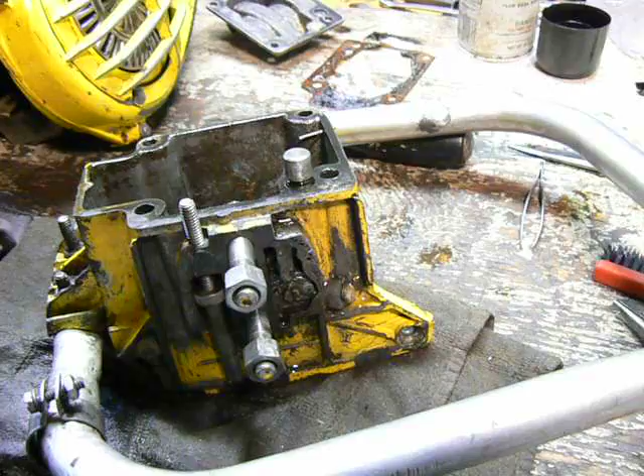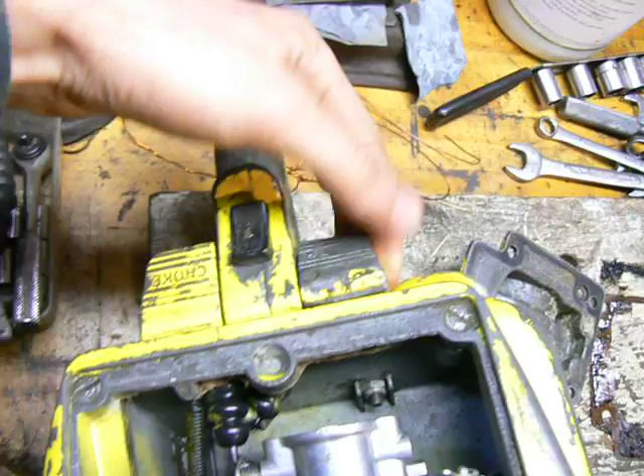One of the problems I noticed with it was that the oiler button, or oiler lever, right here next to the handle, was stuck. It isn't anymore, but I didn't know what it was.

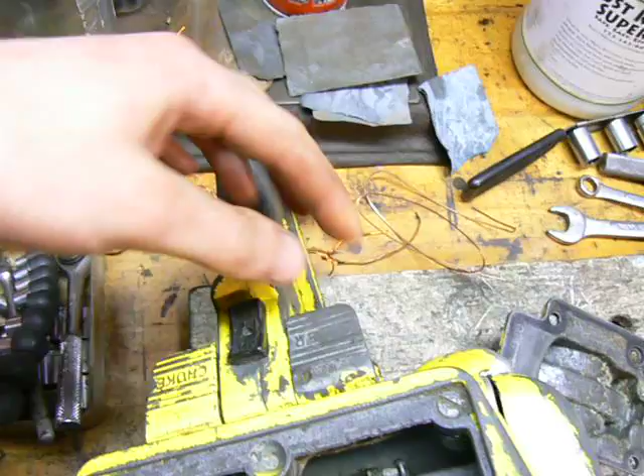So at first I took off the handle, made sure this part of the linkage wasn't seized up, and it wasn't. There's just a rod that goes from here out to the front, and there's this little rod right there. I'll work it and you can see it move. There it is. As you can see, this was all fine.

But what the problem was, again, this saw made a liar out of me. In a previous video, I said the oiler will never be stuck on a vintage chainsaw because it's immersed in oil. Well, this one was stuck.

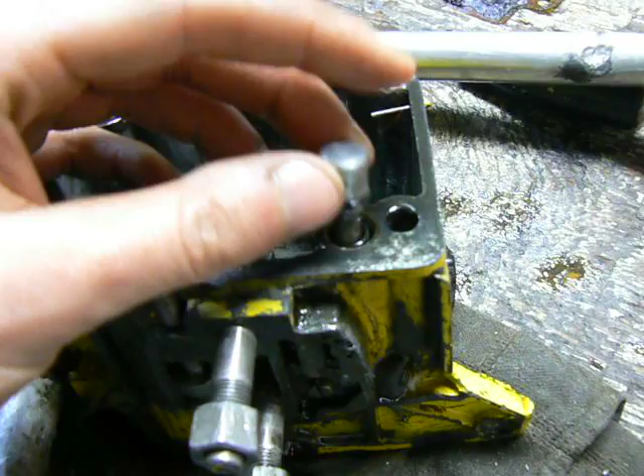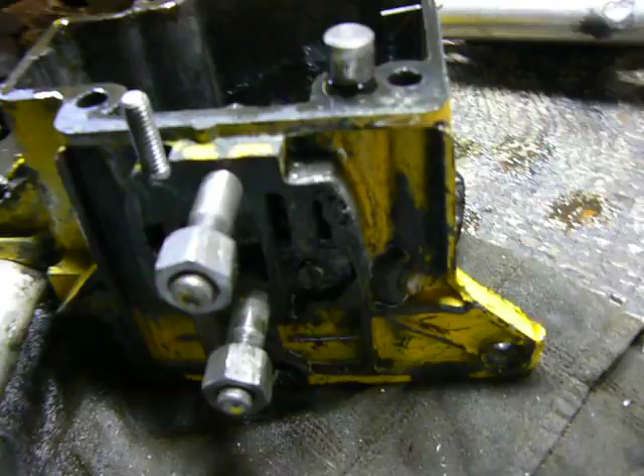This is the oiler plunger, piston, whatever you want to call it, and this was stuck inside the bore. It was down pretty much flush with this surface. I thought, well geez man, how am I going to get that out? Because this is a blind hole - on the other side of the casting here, there's no other end of the hole that goes in.

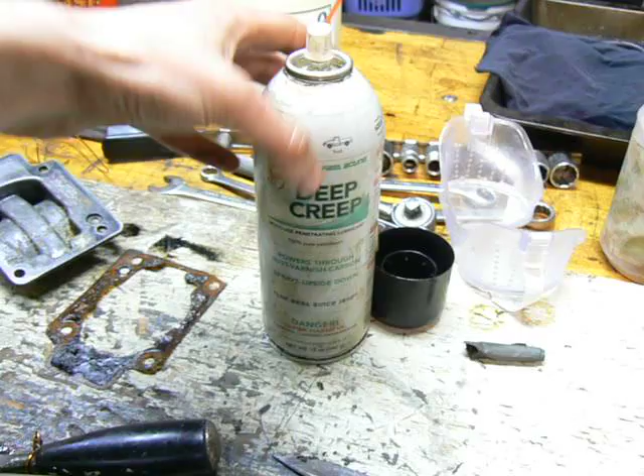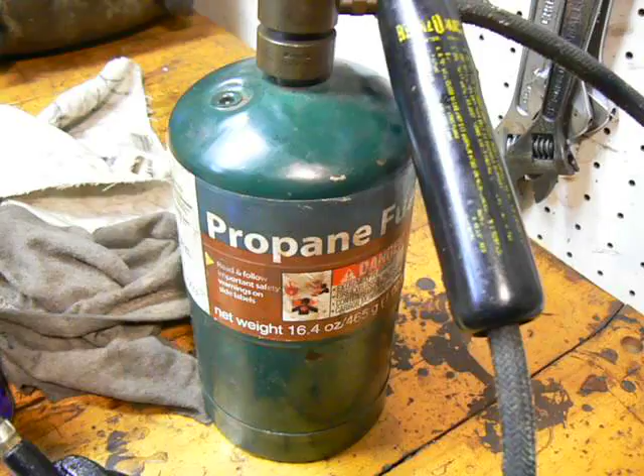Well, you know what, this stuff right here, Seafoam Deep Creep - this stuff is way too expensive, it's $11 a can, but it's loosened up a lot of stuff for me as long as you use it in conjunction with your blue wrench, propane torch. It really helped with a lot of stuck stuff.

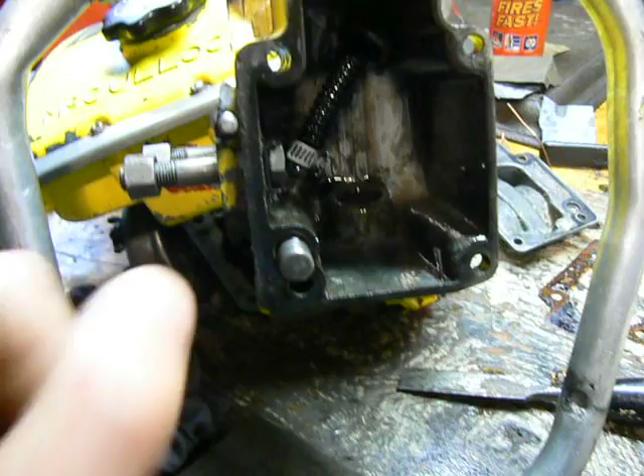So I set it up like this, and I squirted a little bit of oil in there because I previously tried to just push the plunger in to loosen it up, but it just got it stuck further down in the bore. I thought, oh man, how am I going to get that out?

So I put some Deep Creep in here, and I also took off the filler hose, or suction hose, and squirted some inside the other end of this bore, and I just heated it gently with the torch, and all of a sudden, pop!

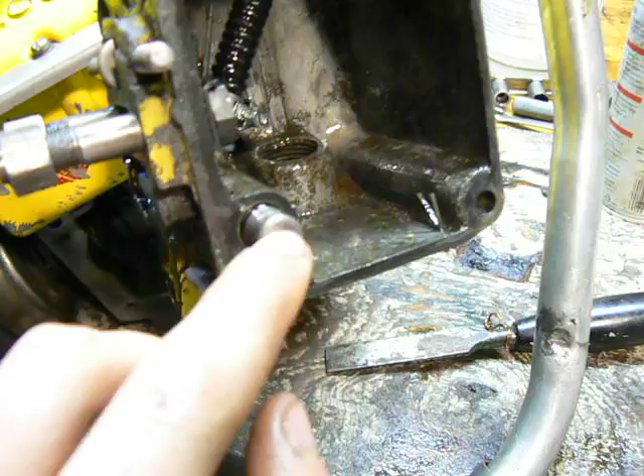The spring went loose, and luckily I didn't get any oil in my eye, because the oil that was in here got shot out when the piston came out and sprayed on my face. Luckily it didn't get in my eye - it was pretty close. But after that, I put safety glasses on.

It didn't come all the way out, so I repeated that process a couple of times. Then the piston came out far enough where I could grab it with tweezers or pliers and pull it out.

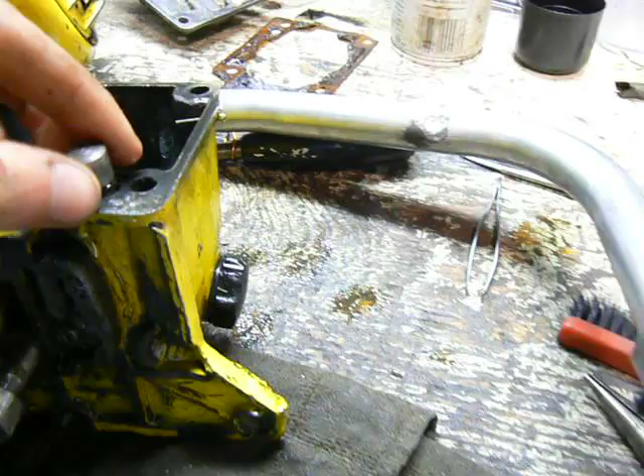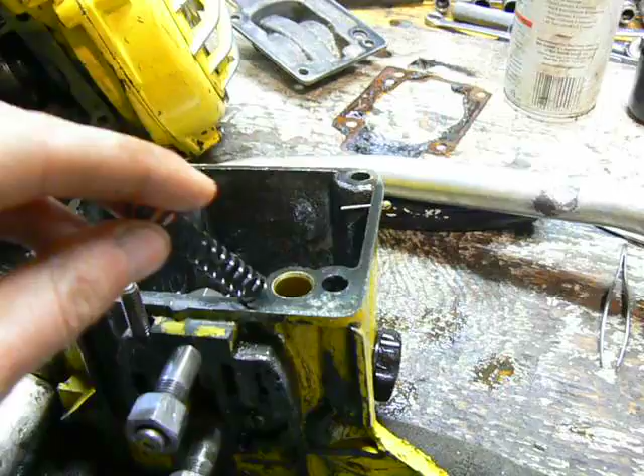As it turns out, it was just a bad O-ring. Here's the plunger - you just use a pick and pick off the old O-ring, and I cleaned it up with some sandpaper. Then there's a spring that goes behind there. That's it, it's a very simple system.

Of course this gets pushed in, goes in like that. And then I'll leave it out a little bit because I don't want it loosening up and popping out and flying out.

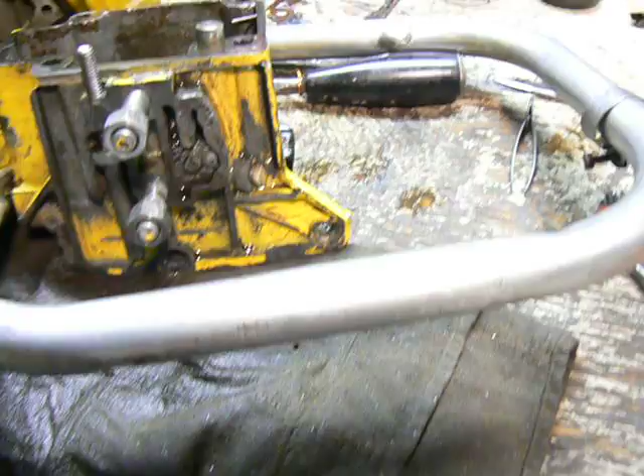I also took this opportunity to do a little more work on the oiler, and I figured some other people might find this comes in handy. Pretty much all of the manual oilers on vintage chainsaws, whether it be McCulloch or David Bradley or Homelite or whatever, all of the oilers work pretty much the same way, and I'll show you what I mean.

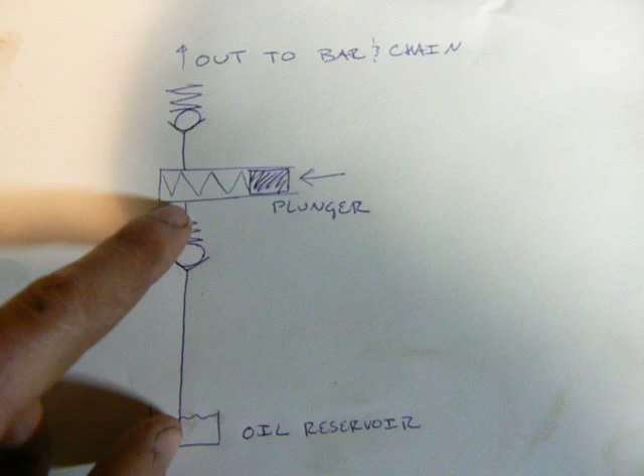I made up this drawing here, it's a pretty simple schematic. Here we have the oil reservoir, and there's a line - in this case it would be that rubber suction line. It goes into a check valve, and then there's your plunger, and then there's a second check valve facing the other direction in relation to the plunger, and then out of that check valve it goes out to the bar and chain.

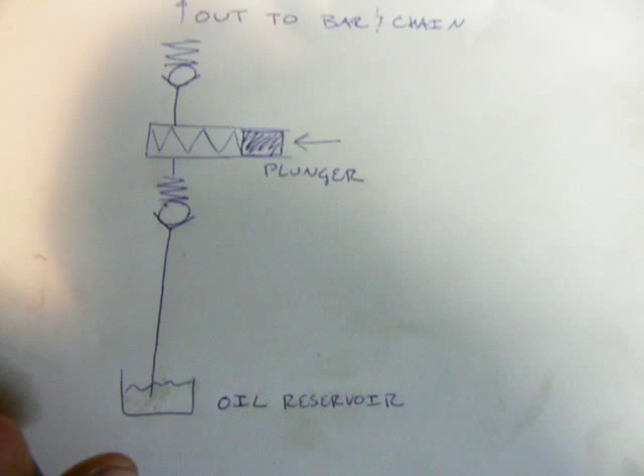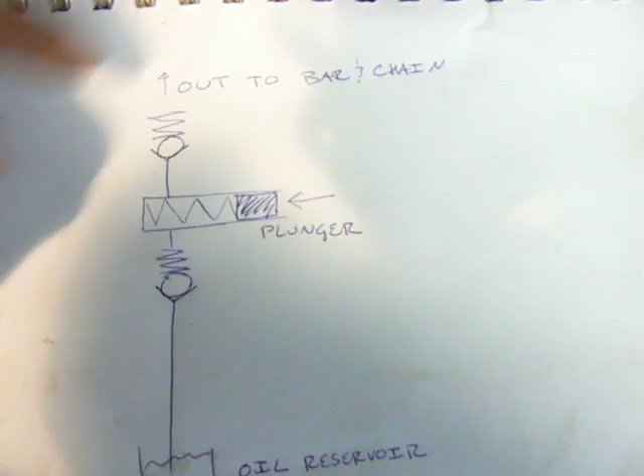If this doesn't look familiar to you, what a check valve is - it's basically just a seat. It's just a hole with a nice even surface, or sometimes a plastic sort of washer, so a steel ball can seat in that seat with a good seal. Then there's a spring pushing down on that ball against the seat, and that creates a seal.

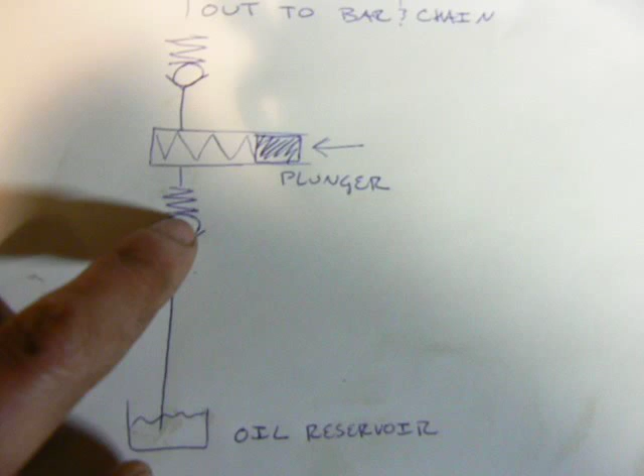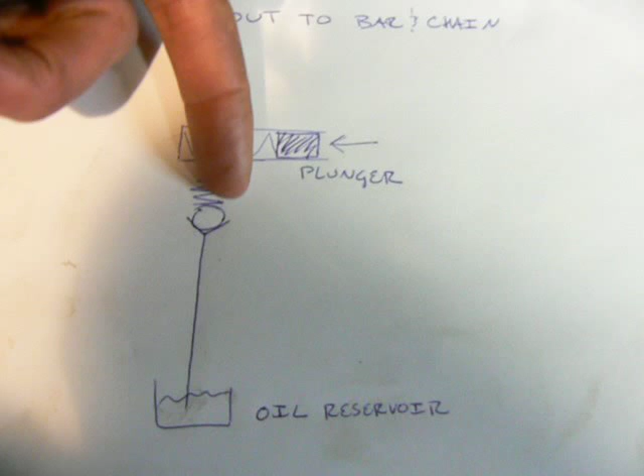So in this case, with this check valve, oil is allowed to flow this way because it pushes the ball off the seat, pushes against the spring, goes around the ball and into the plunger bore. However, oil cannot go this way because when the oil is pressurized this way, it forces the ball against the seat and seals up, so oil cannot go this way.

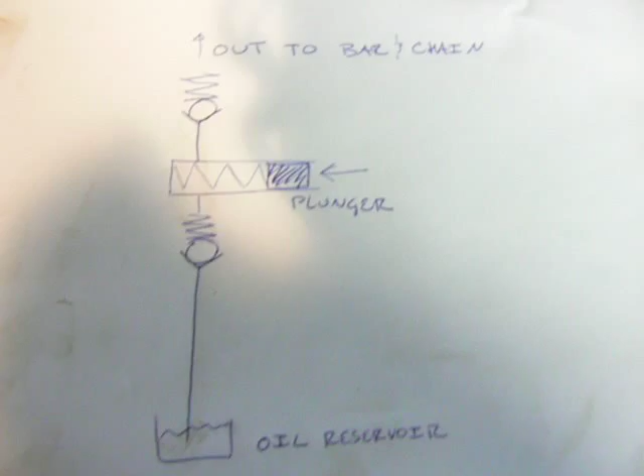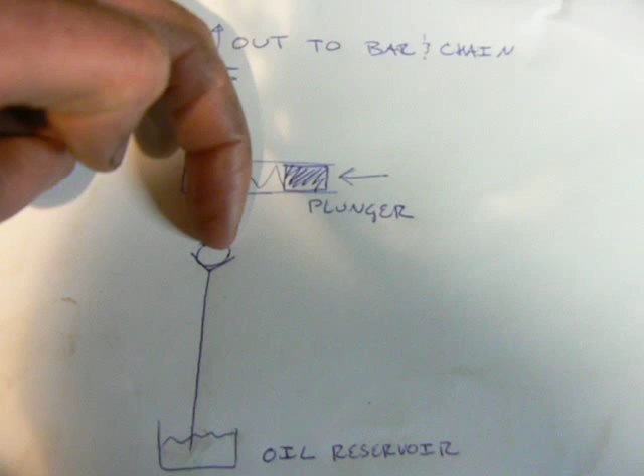So, with one stroke of the plunger, you push down, it pressurizes the oil in here, and it pushes this ball against the seat, so no oil can flow back into the oil reservoir because that wouldn't accomplish anything. But it does push this ball off the seat and allow oil to go out to the bar and chain.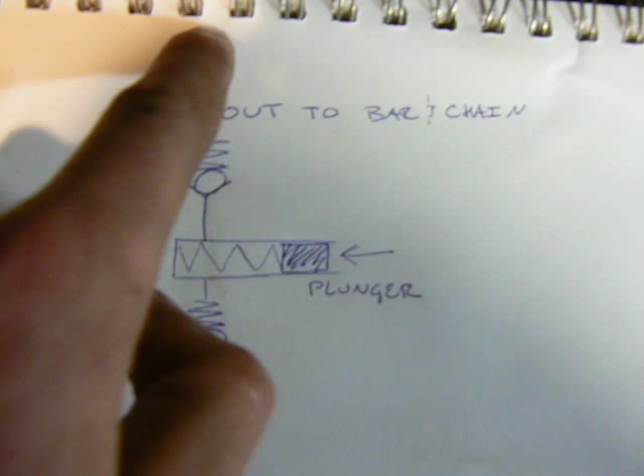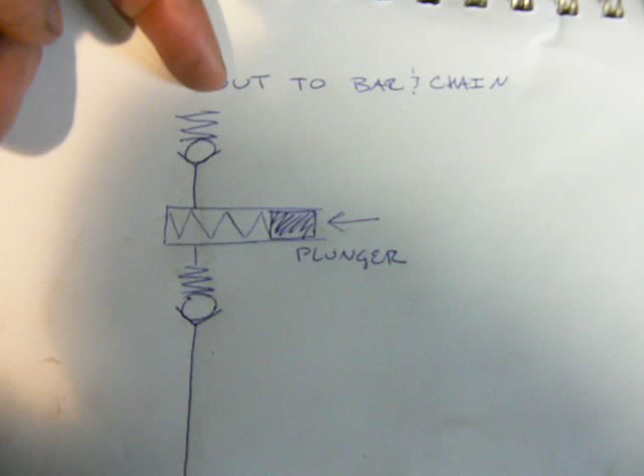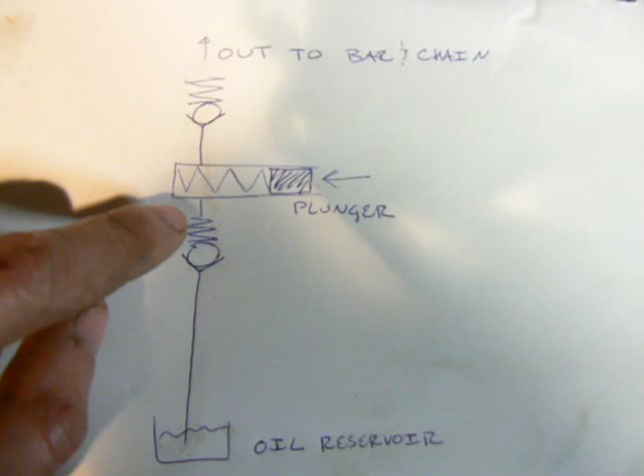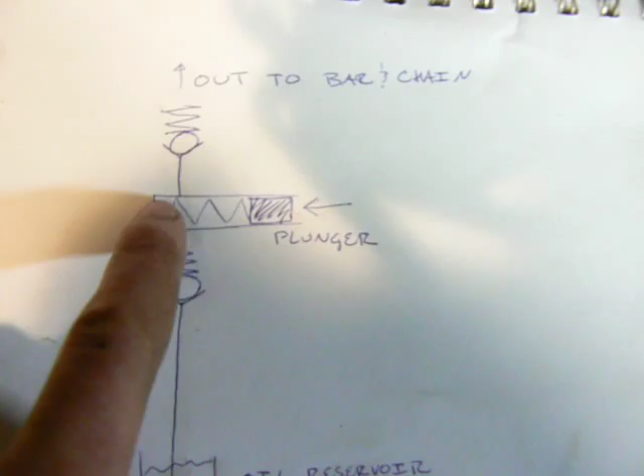And when you let go of the plunger and the spring inside the plunger bore pushes the plunger back, the second check valve here gets sucked in, also helped by the spring, and it seats, and no oil can be sucked back through here, or air. Nothing can get sucked back. This seals off. However, with the suction created inside here, it lifts this ball off its seat and sucks oil up from the oil reservoir into the plunger, and then you can continue to pump the oil.

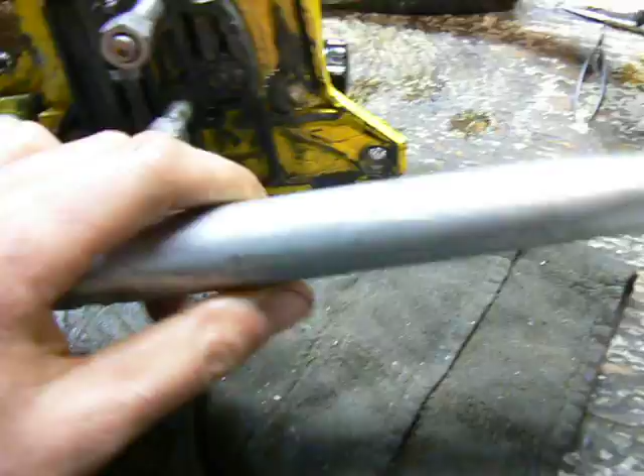So anyway, on this McCulloch, and I would imagine most McCullochs of this era, there are two check valves. There's one right here, and there's one here. This one is the outlet check valve.

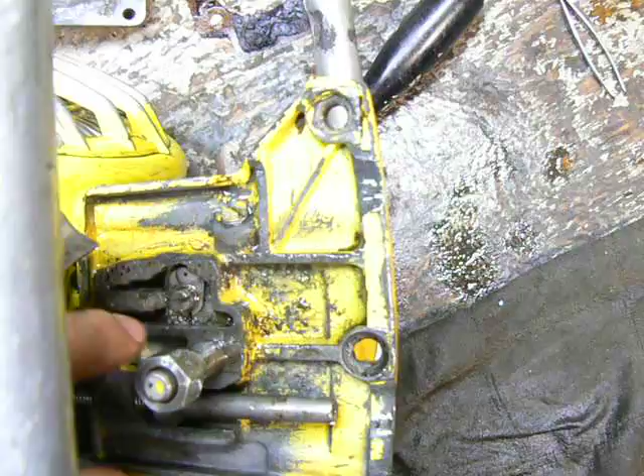If you take off this screw and take off this plate, there will be a spring, and then there will be a ball. Be careful, you don't want to lose those because they're probably difficult to find. And if you take out this screw, there is going to be another spring and another ball. I took those out, and as it turns out, this spring and ball were all corroded and dirty, and I guess this magnesium casting kind of corrodes badly.

So I cleaned all that corrosion off, and I put that back together, and I took this out and I cleaned it all out, put it back together. And so now I know that the oiler is fully functional.

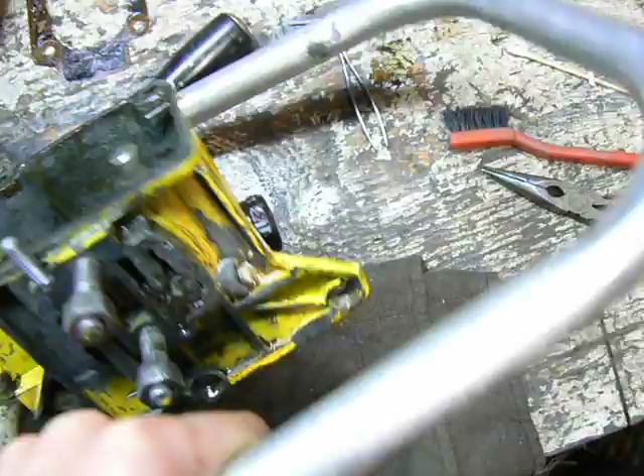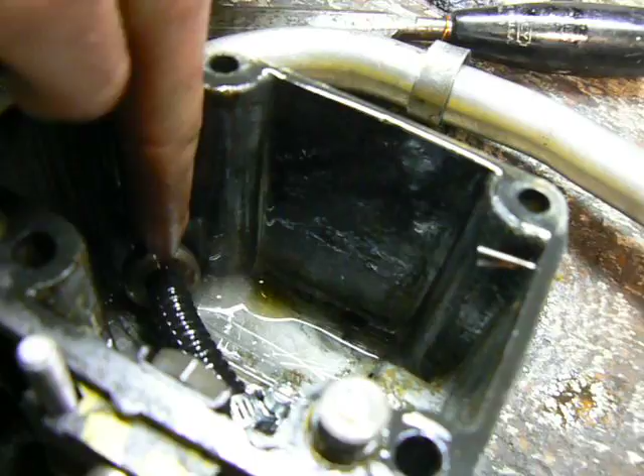And to test it, it's a good thing I tested it. All I did, I just set it on its side like this, and I filled up a little bit of oil in here so it covered the inlet. And I pumped this with my thumb. And it pumped oil out of the check valve, and it worked, but it was pumping a lot of bubbles, air bubbles, along with the oil.

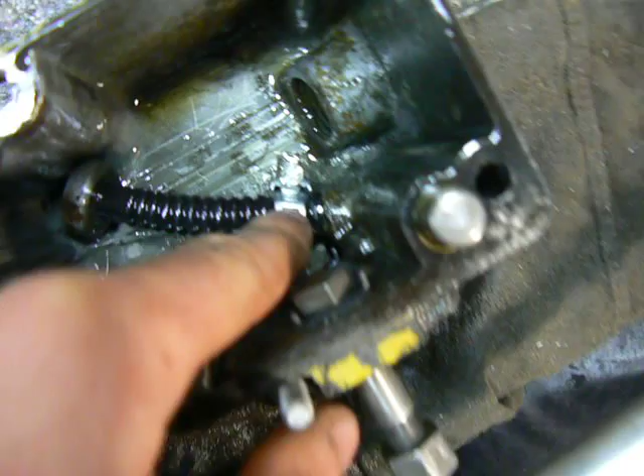And that means it's pulling air into the system somehow. So I figured, I learned that this joint right here where the rubber hose attaches onto the fitting for the plunger bore, that was a very loose fit. And I don't really know why it's like that. It should be like a regular hose barb, like you would find on anything really, anything where a rubber hose attaches onto a metal part.

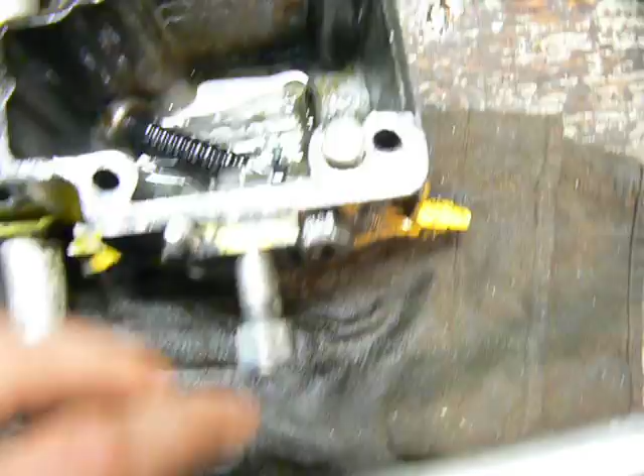So I found this nice little small hose clamp, and I tightened it down real tight, and I filled it up again with oil, and sure enough, when I pumped it, it pumped out a good squirt of oil. And now I know that my oiler is fully functional.

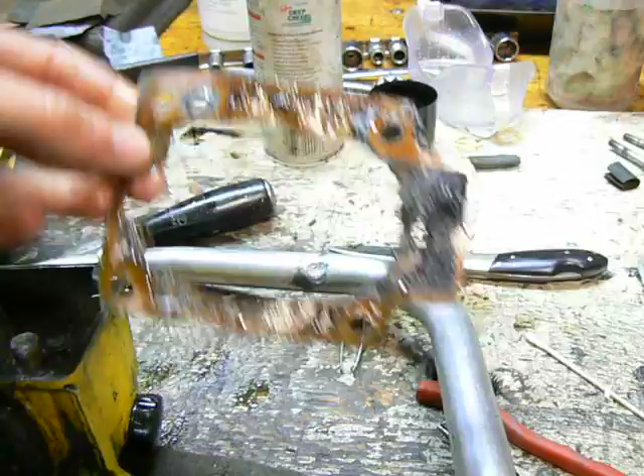And now all I have to do is make another gasket, because this one looks a little worse for wear. I don't want to put this back together and have this gasket leak. But I think this is just like a heavy paper gasket soaked in oil, so it should be pretty easy to make one.

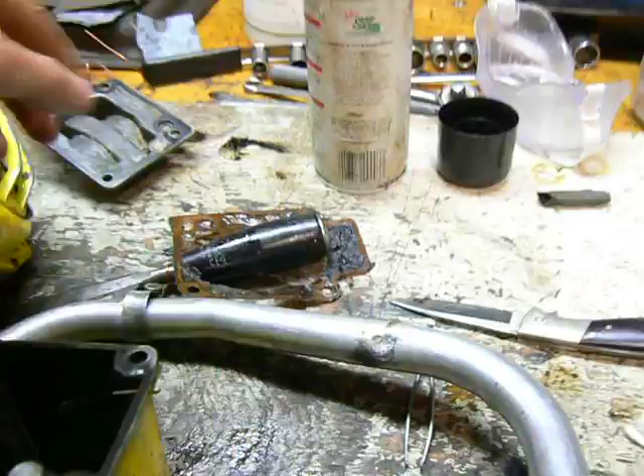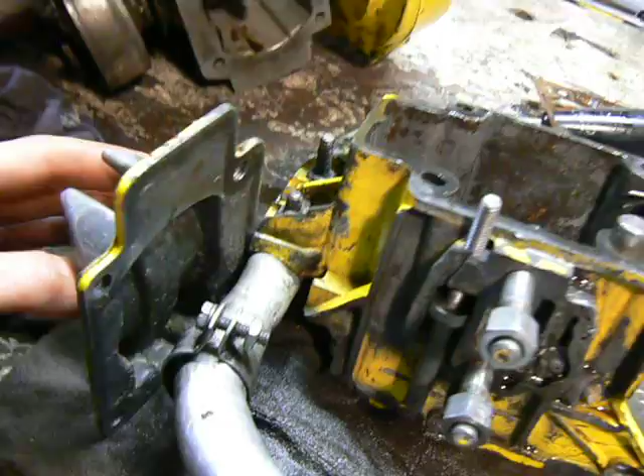Make another gasket. That'll go on to this crankcase bottom slash oil reservoir plate. Goes on like so. That's backwards. Goes on like that. Then it goes on the crankcase there. And then that plunger rod goes through everything.

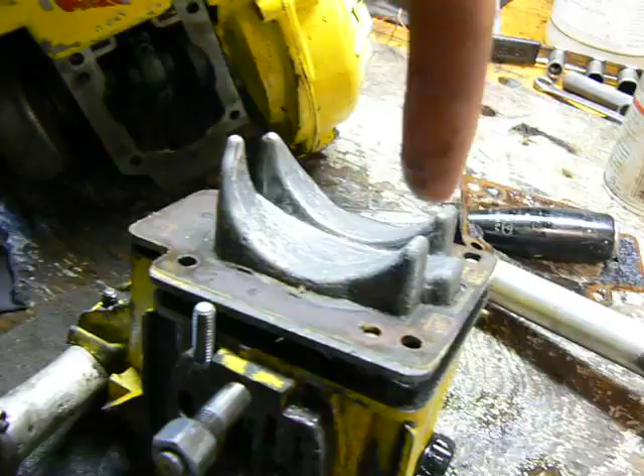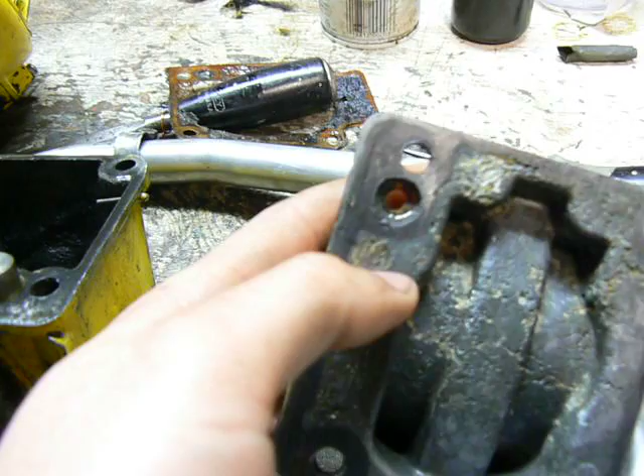One other thing I might do, might find some sort of a washer to put right here, where the plunger rod comes through. I might find some sort of a rubber washer or grommet to go in there, because I think part of the reason why this was seized up is because when I took it apart there was some sawdust in there. I'm amazed sawdust managed to find its way into this plunger bore, but that might have dried out some of the oil and introduced contamination and caused the plunger to seize. Actually, it was the old O-ring, I think, that collected a lot of junk, and that's what really seized it up. The plunger itself wasn't rusted or anything, really.

But that's it. And you can see, even for such a simple job, just fixing an oiler, look at all this stuff I have here: nuts and bolts, a knife, a flint striker for my propane torch, a couple bottles of various oils, a chisel, everything.